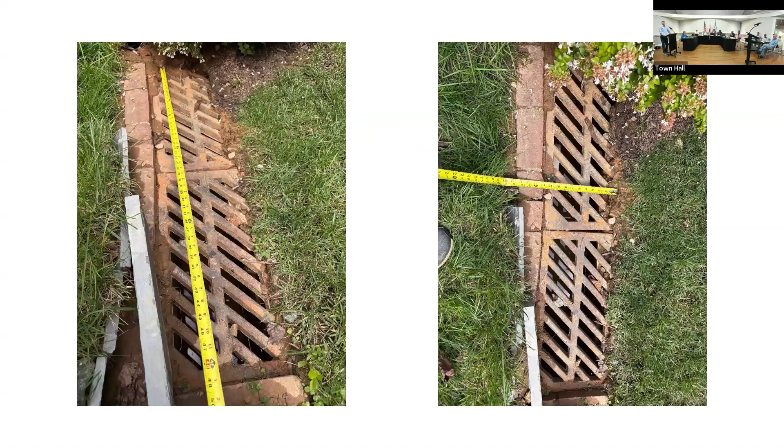Steve Simpson is the stormwater management supervisor from Montgomery County, and you can see at the bottom that he said we're closing the permit for 4905, meaning that everything was fine, we passed, that's it. Oh, sorry. And Steve provided a lot of information, a lot of detail. This is just a picture. I don't want to say anything.

This just shows you the size of the original inlet that we're talking about. It says 4 feet by 1 foot. So it's a big inlet, a lot of water can definitely go in. Okay, move to the next one. So this is just a quick summary: the inlet is 4 by 1. All stormwater management professionals deemed the observation not to be an issue. And all Montgomery County permits are finalized and closed.

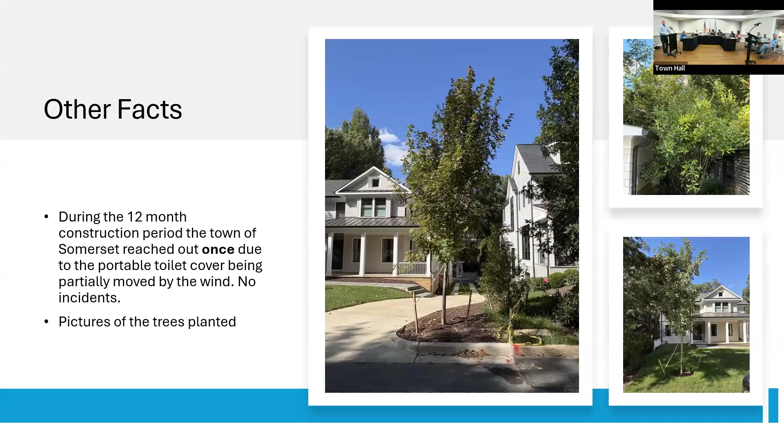Simple things, I just want to point out that during the last 12 months of construction, the town of Somerset reached out only once, due to a portable toilet cover being partially moved by the wind. And in 4 months there have been no incidents. And these are some pictures of the trees that we planted. Oh, yeah, we need one more slide. And this is the video that shows the rain.

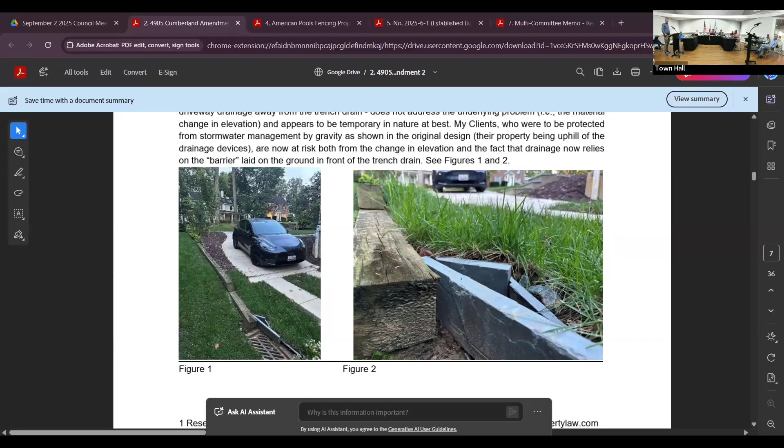I don't understand why the process is what it is. It seems to, well, we're worried. I hope you guys said it. Okay, thank you. Council President Barr, do you have any questions? Yes, I do.

First, I'll talk to Mr. Bracciali. Why is it 12 inches higher than was approved? The contractor made a mistake. It's such a little detail, the detail was there, written, but he made a mistake. Usually the driveway comes down, you know, same slope, and he didn't know this stuff. So the contractor made a mistake? Yeah. All right. Is the wood that we saw there a permanent solution or is there another solution?

That's not wood, that's a stone, just a simple stone, no cement, nothing. It's a simple stone, and Mr. Boyd, when we met with the inspector, was explaining that from his perspective, there could be water coming from my driveway and going to the inlet. And so the stormwater management inspector heard that and asked me to make sure that the water wouldn't go there.

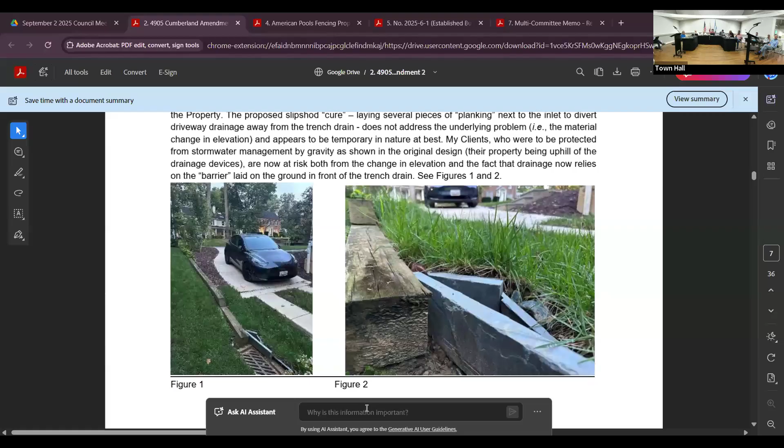Councilor Rovak. Can we put back up that picture? The one with the makeshift stone, from the lawyer's letter. Yeah, that one. Okay, so my first question. So that drain there, and the wood was already there from you guys? Yeah. I was going to tell you.

I'll explain it. When we were moving in, the neighbor, this is all a foot down there. It was sloping very low, and they were concerned that the stuff was going to go in there. And so they asked, what are we going to do about it? We said, how do we do this? It worked, but it was this part here and this part here, not the makeshift part. But the wood was yours that you put in? I think technically it's theirs, because it's on that property, but we installed it.

Okay. And then the slate makeshift thing, why is that there? Would you just remove it, or can it not be removed? I'm curious, I don't know who to ask. It's just a flat stone, like a pad. That's it, just a stone. It's there at the request of the inspector to divert the water coming from uphill down. It diverts it. This water's supposed to go down there, but it's not necessarily going to do that. That's what he said.

Oh, so it's taking the driveway water and making sure that it doesn't go into that drain. Making sure is a strong word. I mean, you saw the videos. Well, hold on, she was asking, and you'll be able to rebut. Let her ask the attorney. So the DPS person asked for that stone to be put in so that the water stays along the driveway line and doesn't go into Dr. Borak's lawn.

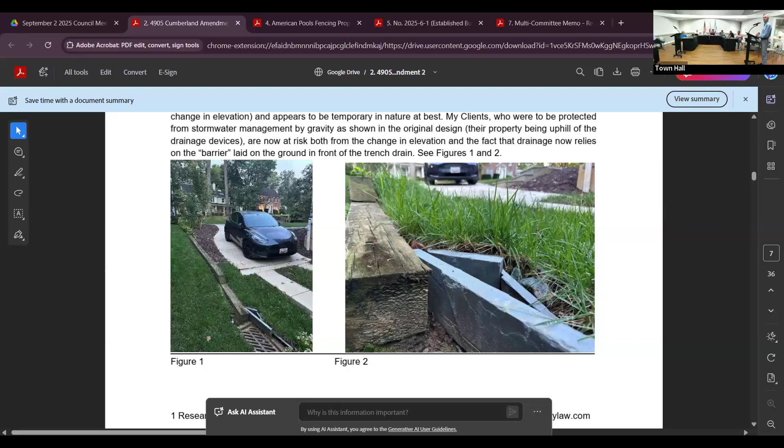Was it too large a file, didn't make it to you? No, it's here, it's the computer. How many photos are there? That's sort of the last picture of the series. But I think the next question is, what's the layout of the border around the inlet? Which picture? I could just go to that one.

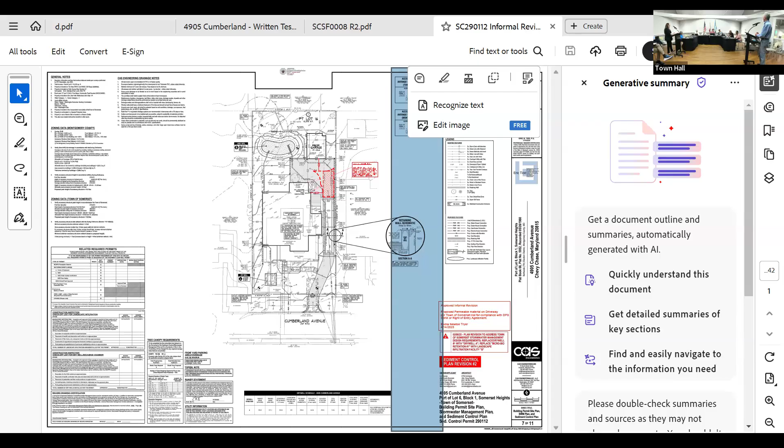And our Somerset stormwater requirements are more stringent than the county's. But the county is able to give us this certification based on what? They don't follow our standards, so how do they know what they're talking about? That is a great question. They are only inspecting to the county code limit. There you go.

So what does that mean? That means the dry well and the rain garden were sized larger to satisfy the town. And then DPS verified and inspected to make sure that they were built correctly. But when it comes to the question of whether the inlet drain allows enough water to flow from uphill, I do not believe that DPS is looking at Somerset's stormwater requirements; they're looking at the county requirements for water flow, which is less.

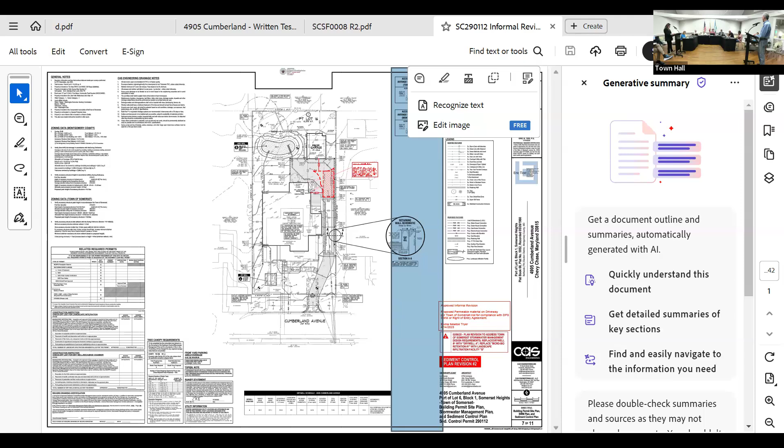And so do we have that look? Are we able to say that the inlet and the design as it is now would be okay in a 1-year event? That's what CAS Engineering confirmed. I believe that their assessment is correct. But just to reiterate, I am not a professional engineer at this time. I was in the past. I'm not licensed to practice professional engineering, and I rely on the judgment and analysis of professional engineers.

So just my last question, I think for you, Steve. If this was a new application, what would we be doing? What would we be asking for, and what would the documentation requirement be? What analysis would be required? This is brand new. Lessons learned. No, but if, for example, the applicant had come with a request for a driveway 12 inches higher than where it is today, what would we have asked for?

If I understand your question correctly, if the plans had been presented for it to be 1 foot higher, as it is now built, we would have asked other questions at the time.

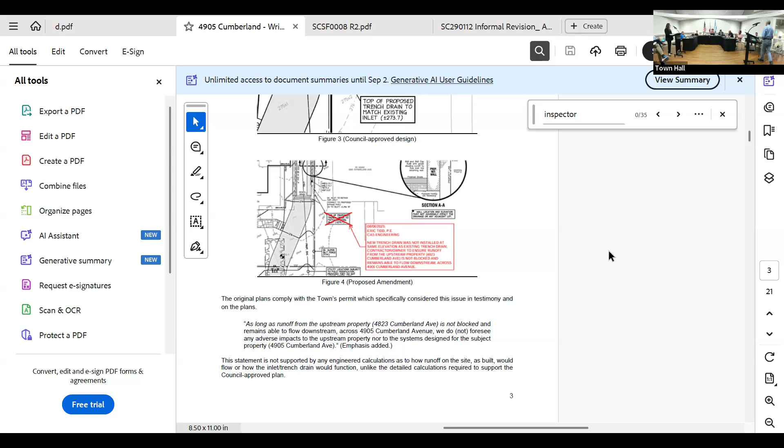So what we're going to do now is close the questions from the council. Is there anybody else who wants to testify? Were there going to be rebuttals or anything at this point? I just want to see if anybody else. Okay, so I think what we should do at this point is have, I think the neighbor wanted to speak, and then we'll get a final rebuttal if necessary from the applicant, and then we'll close the record.

Thank you. EJ, could you pull up page 3 of the letter that I filed? I'd like to focus on the 2 images shown on that page. And I'd like to use these 2 images to answer directly the question, Councilmember Khanna, that you had posed about water continuing to flow downhill from the uphill property. There is an existing inlet to remain at an elevation of 273.7.

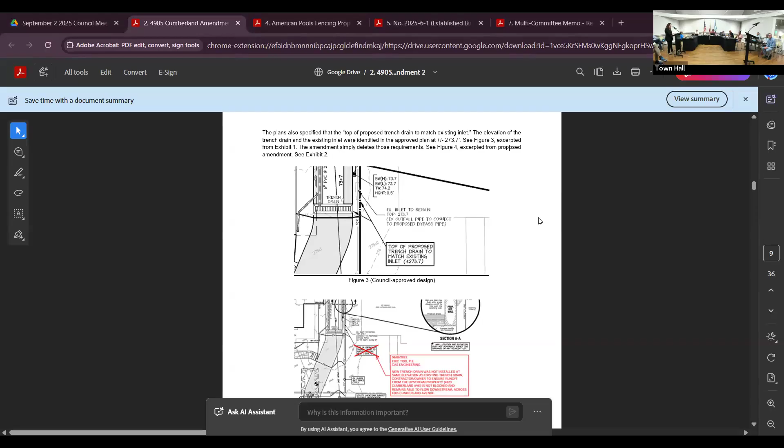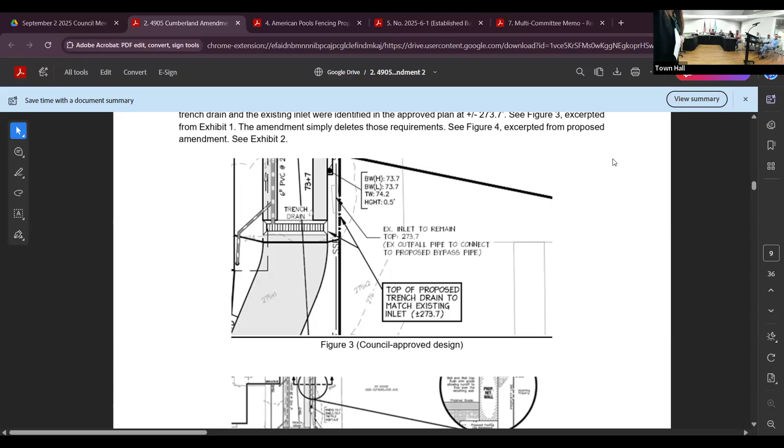And I'm going to walk up to the image just for a moment. The inlet to remain, 273.7 elevation. Top of proposed trench drain to match existing inlet, 273.7. That is both this drain here and the drain in the driveway. Meaning that everything that's uphill, 275, 276, the uphill Borek property would drain this way, not only to this drain, but continue to flow across the driveway.

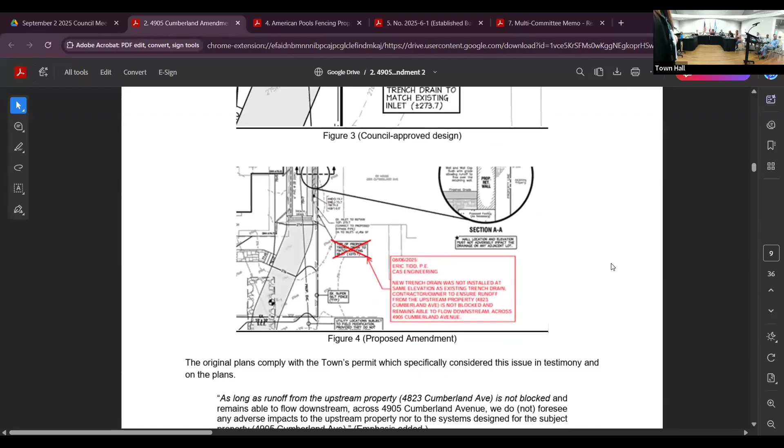The proposed amendment, and EJ, if you could show the image below. The proposed amendment deletes that requirement. The reason why it deletes that requirement is because this driveway drain is now 12 inches higher than the pre-existing inlet. It can no longer flow downhill across that property.

The reason why this is important, and I know there has been a lot of discussion about DPS, there's 2 things I want to say about DPS. DPS has Montgomery County stormwater standards, and it enforces those, and it conducts inspections. The town has its own standards. This is a town permit. These are standards that were adopted by the town.

And so you have independent review and authority to consider and determine whether or not you want to modify this plan in a way that no longer allows stormwater to run and flow downhill, including across the driveway. It's not just my representations. I will proffer that I asked that question of CAS Engineering at the hearing, specifically because I wanted to know the answer. And that is the testimony that I recall that he gave.

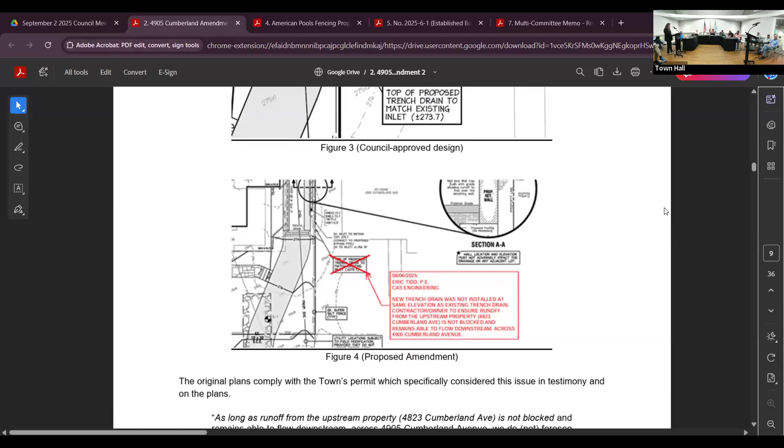The other thing that I want to point out is that even though DPS has signed off on this plan as being compliant with their regulations, it's with a caveat. And Steve Simpson from DPS has said they received the following statement from the engineer: As long as runoff from the upstream property 4823 Cumberland Avenue is not blocked and remains able to flow downstream across 4905 Cumberland Avenue, we do not foresee any adverse impacts to the upstream property.

That's a caveat. Now, how will this makeshift repair affect the ability to block or not block the flow? I really think, honestly, that's a red herring. The reality is the driveway is now a foot higher, and the water can no longer flow downstream, across the side of the driveway, and across the driveway itself. That was the intention, that was the representation, and that was the design.

So again, we would ask that the property be restored to or built to the standards that were applied by the council after some very lengthy discussions about this driveway and about this issue. Thank you. Thank you. And now, rebuttal.

Yeah, and if you can keep it. I was looking for the same picture. Remember, your rebuttal has to be new information, not restating what you've said before. I just want to, I just need to. I'll let the town attorney rule whether it's appropriate rebuttal. Okay, Mr. Mayor.

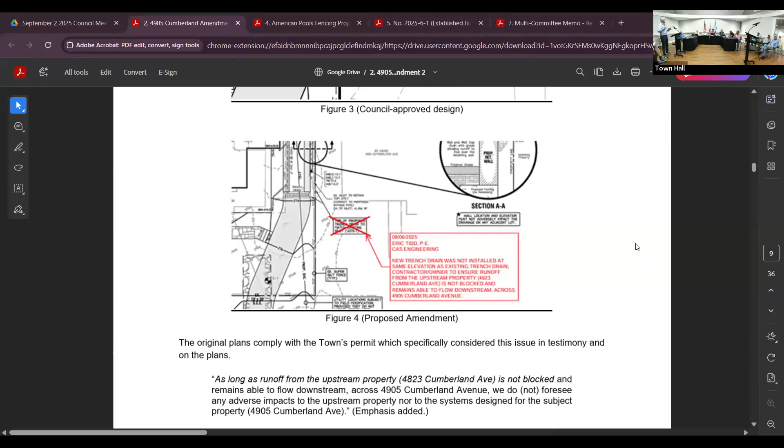So, CAS Engineering analyzed the situation, and like they wrote here, this trench drain is 12 inches high, there's no doubt about it. But then, like they say here, contractor, sorry, contractor's to ensure runoff from upstream property, and so on, is not blocked and remains able to flow downstream. So.

Montgomery County Stormwater Management Inspector and Supervisor came and verified the runoff water from my neighbor's property flows through my driveway. So basically, there is no issue. The experts are saying that the water can flow through my property, no problem.

Honestly, I don't know what else I can use. Thank you. Okay, thank you very much.

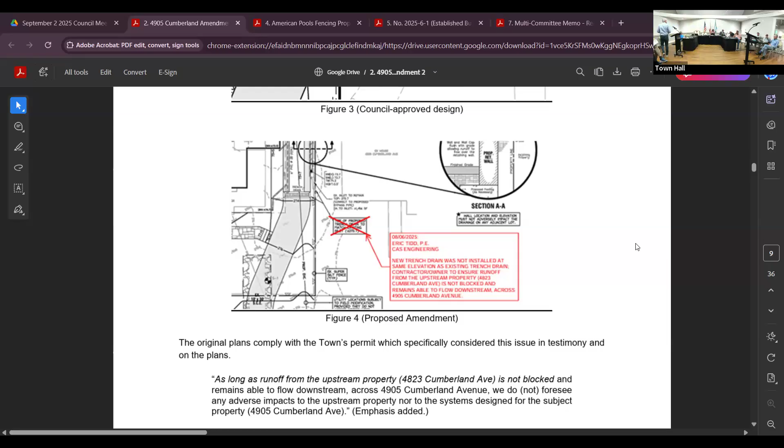So this concludes the public portion of the hearing. The record is now closed. The council may now discuss and deliberate on the findings of fact and conclusions of law and may vote on the application. And I will turn it over to the council president to lead the discussion.

Right, so what we're discussing, to remind you, is variation from the approved plan in which the elevation of the driveway is 12 inches higher than it was in the approved plan. And that's it. That is what we're currently trying to consider. So, anybody got any thoughts as we try to find out where we are on it? Anybody want to go first?

Certainly, yeah. Could the town attorney repeat the points he made earlier? My mind was a little bit focused on my questions then. I think you made some very important points and issues that we need to think through, and maybe you could just repeat those points for us.

Sure, so Councilmember Khanna, after my attempt to frame the issue, you framed it better than I did. You said if this application was presented for the first time today, would we approve it? Basically, that's the question for the council. You're asked to approve this amendment to the plan.